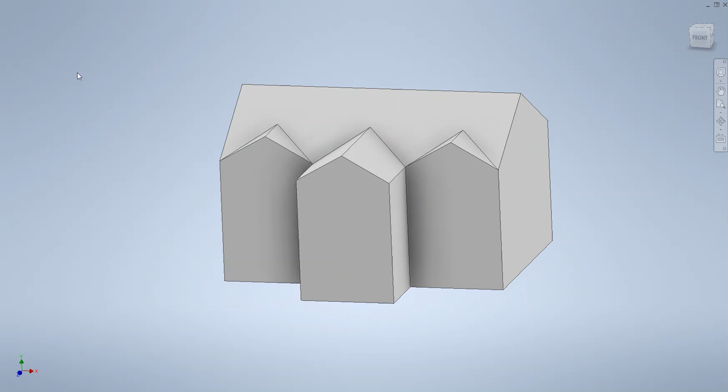About the window lines, we have to center each window inside the dormers. So I'm going to select the plane of the first dormer and create a sketch. Windows are supposed to be centered, so I'm going to draw a construction line that will enable me to center the window. To do that, I'll generate the line and find its midpoint.

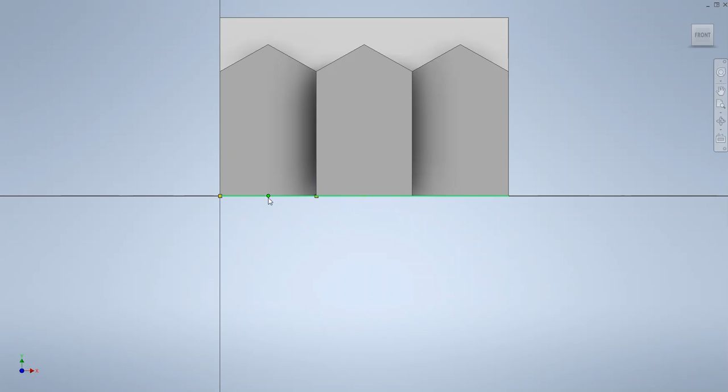Now, how high should the windows be? Normally windows are about 7 feet above the floor, but inside the floor of the house is at least 12 inches higher than the outside ground level. So we're going to make it 8 feet high. I'll draw a line that's about 8 feet high, 0.8 inches, then escape key. This is the beginning point of my window line.

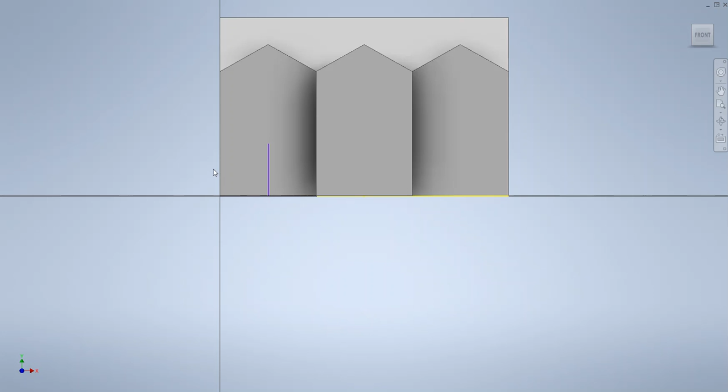So I'm going to use the rectangle command and select the top point, generating the first half of the window. This is going to be a 3 by 5 feet window, so width is 3 feet and height is 5 feet, meaning 0.5 and 0.3 inches.

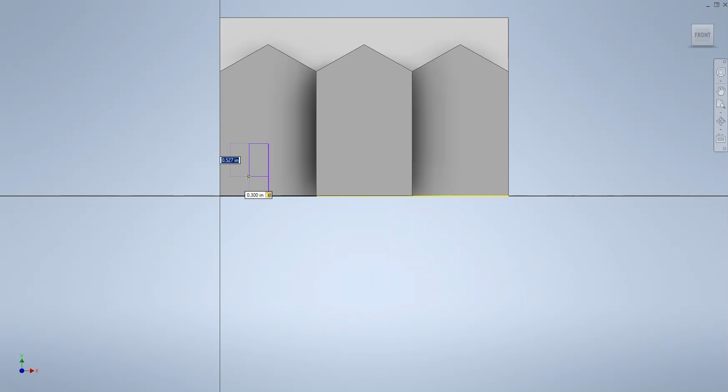I'm typing 0.3 because width is already highlighted. Now press the tab key, type 0.5, and press enter. First half of the window is created.

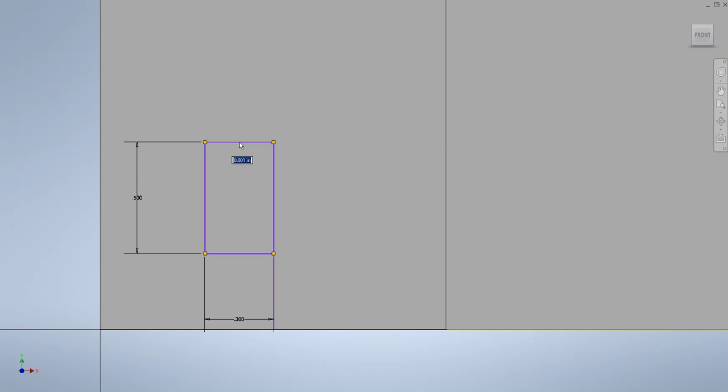The second half is going to be an exact mirror copy of the window. I'm going to zoom in a little bit to show the thickness of the frame of the window, and use the offset command to select it. This is about 0.2, or 0.02 inches should be good enough.

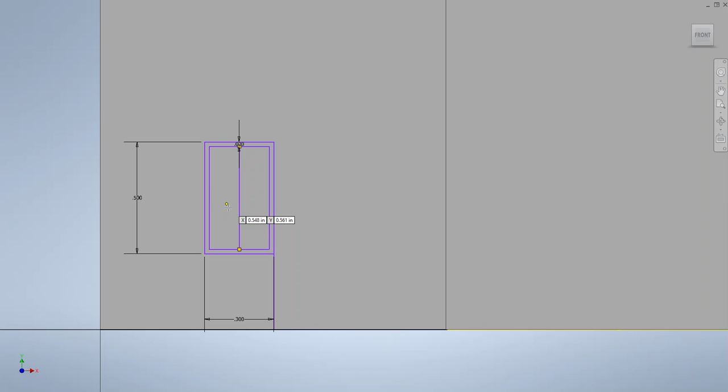Now I need to draw a vertical line from midpoint to midpoint, because this is a double hung window. A single line, and then another single line again, midpoint to midpoint.

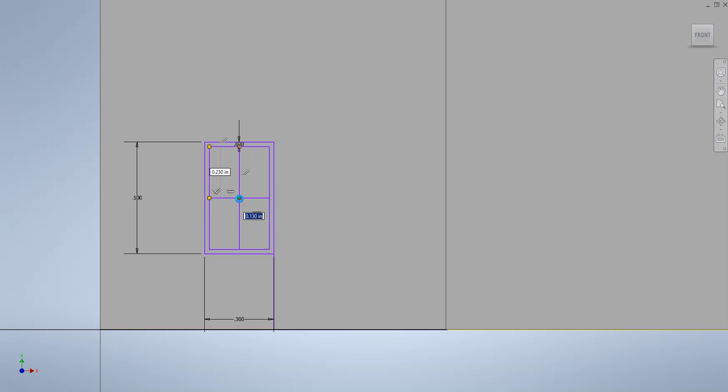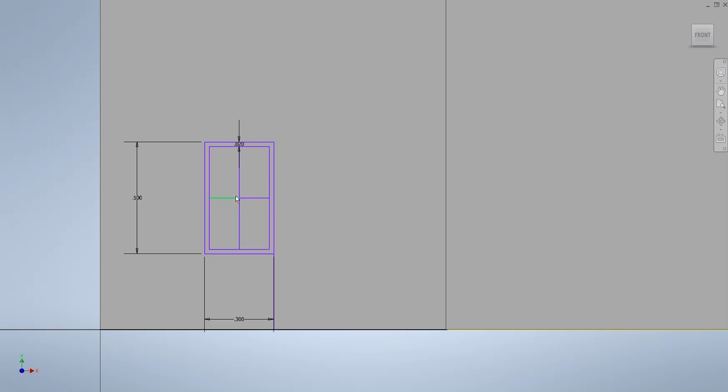I'm creating a rectangle right now, and generating another rectangle, and one final rectangle here. So each of the four rectangles will be projected and offset by 0.01.

And after projecting 0.01, we're going to do another offset, this time 0.02. That's about the thickness of each frame.

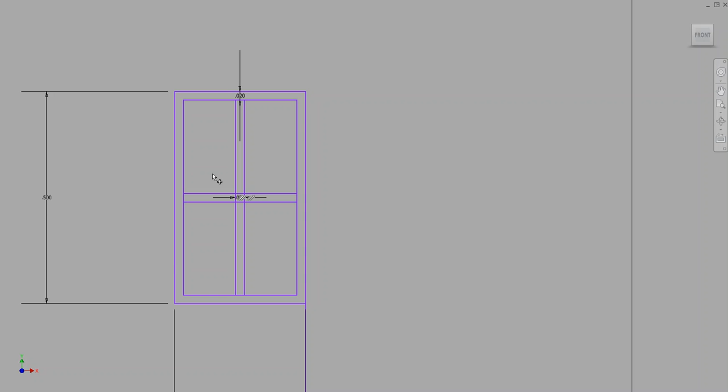I'm going to erase the extra lines that we don't need, because my second projection is going to be 0.02. So I press the line and erase, and use the offset command again, this time to the left, 0.02. We need to trim some of the lines here.

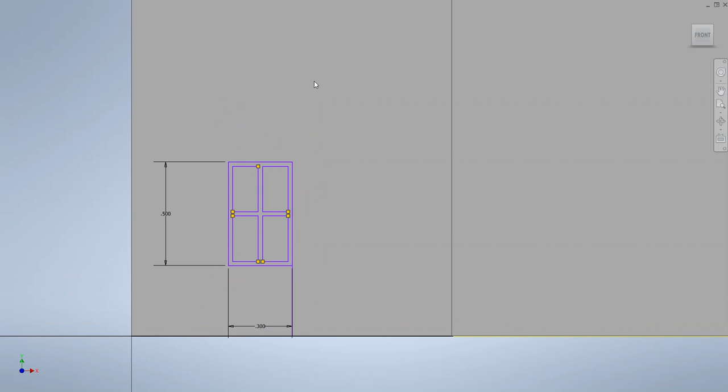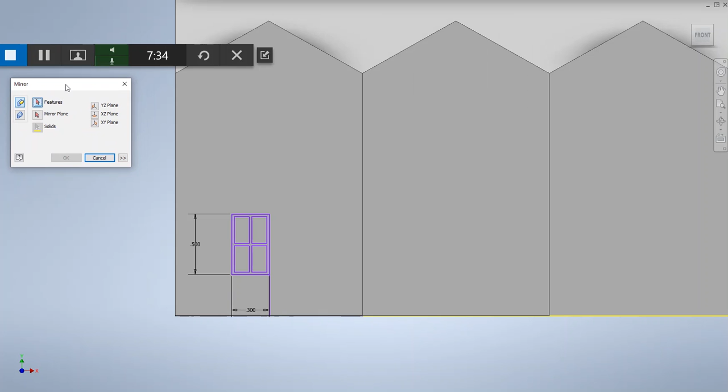So that's half of the window. The next thing to do is make a mirror copy of the line based on the window, and that's exactly what we're going to do. There's a mirror command in the middle of the screen, and we're going to select that and select the entire window features.

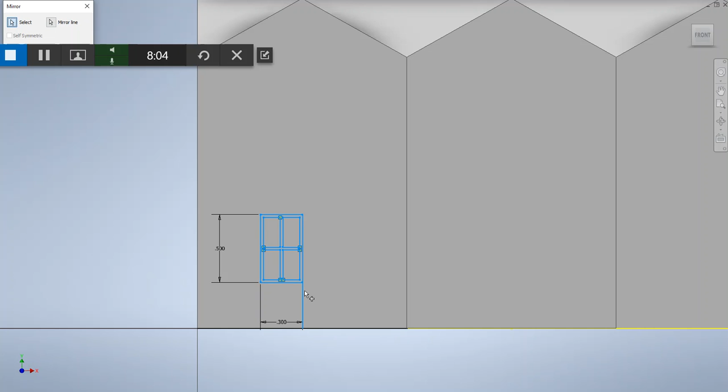I'm still in the shell, still in the sketch. Select the mirror command, select the window, and select the mirror line option. The mirror line has been selected. Click apply, and it's done. That's what it looks like.

We can apply it to the second floor and then to the next dormer and so on. So I'm going to use the copy command to apply it to the second floor, which is going to be about 11 feet high, or 1.1 inches at the scale.

So I'm using the copy command, selecting the object, selecting the base point. I'm surprised right now that it doesn't show me the distance of the copying vertically. I should have chosen the precise input.

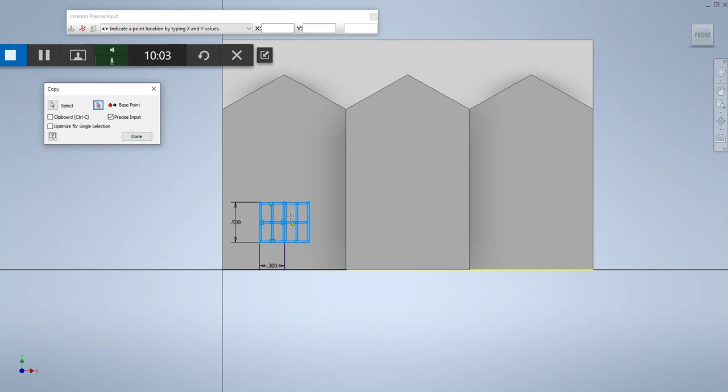So I'm going to draw a line again, just to make sure. Now precise input gives you a screen on top which is going to help me. I'm going to use it one more time after selecting this. So, copy command, select the entity, select the base point, select the top of the line.

Now, we want this to be perpendicular, about 10 feet high. I might as well draw a line.

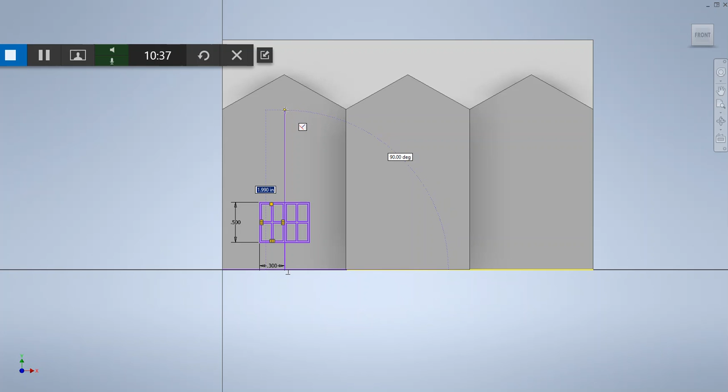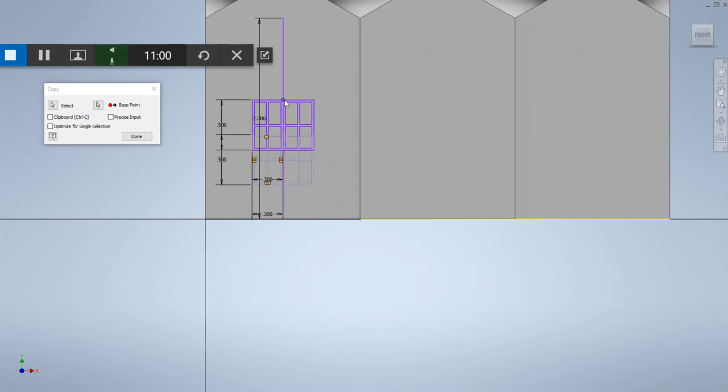Okay, now use the copy command. Copy is made, and now we're going to extrude.

Before extrusion, I need to erase the line that we don't need anymore. I'm finishing the sketch at this point, saving my work, on the desktop this time. You can save it on your personal drive that carries your student ID number.

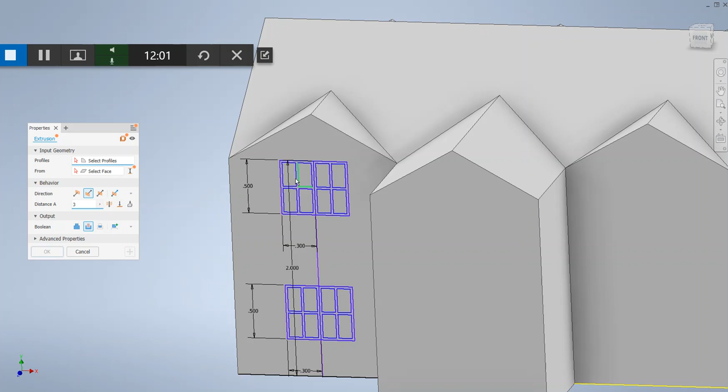And I'm going to use the extrude command. There are going to be two kinds of extrusion. The holes have to be extruded with a cut option, about 3 inches. So I'm changing the number to 3 inches, and I'm going to select each one of them.

Just wait until the square is selected. Move your cursor on the square with a cut option, cut type of extrusion. And you're going to keep doing this for the second floor window and first floor window as well. Wait, move your cursor, wait, be patient, then click. Do not click quickly, wait until the computer recognizes.

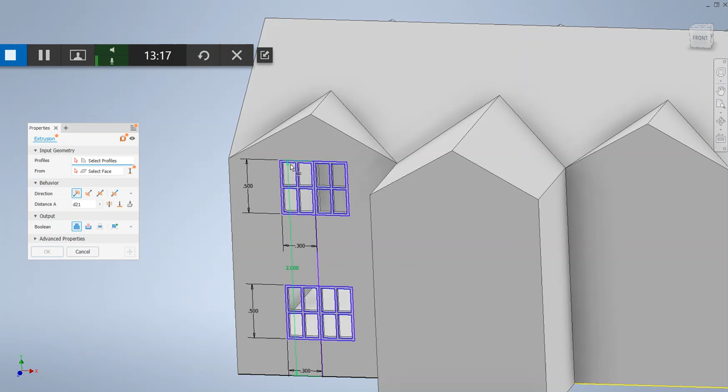All right, and now this is one kind of extrusion, the cut kind of extrusion. Next extrusion, I'm adding, the window frame has to be extruded towards me. This was an extrusion away from me; now it's towards me. So I'm adding the plus button at the lower right-hand corner. Now I'm selecting plus extrusion, and this extrusion is going to be...

0.1 inches. Click. That may be too much. Let's go with 0.05, half of that. That's probably better, okay.

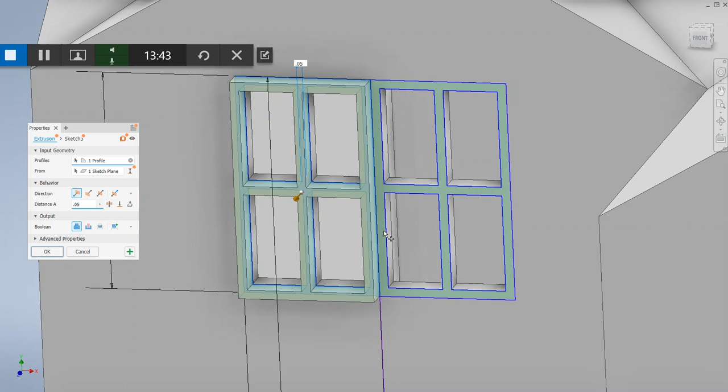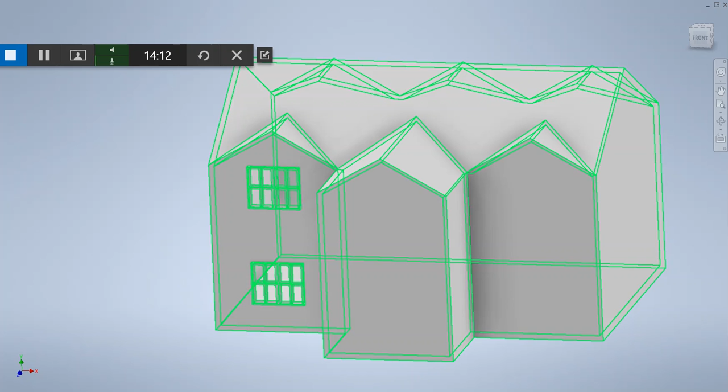And I'm going to do the same thing here, and then same thing here. All right, so this is one type of window, on 2 floors. I'm going to save this as activity. The next window is going to include 1 door, the entrance door, and the second level window.

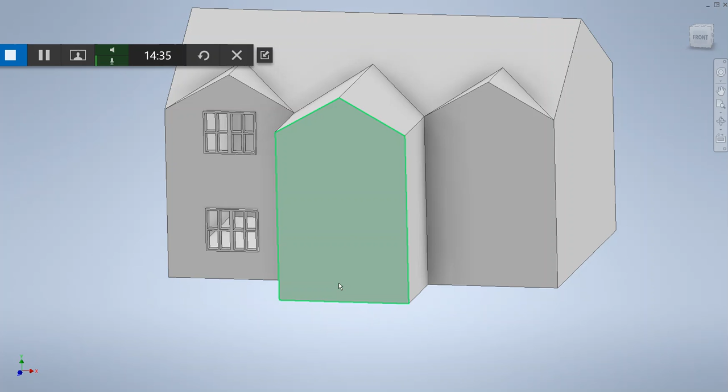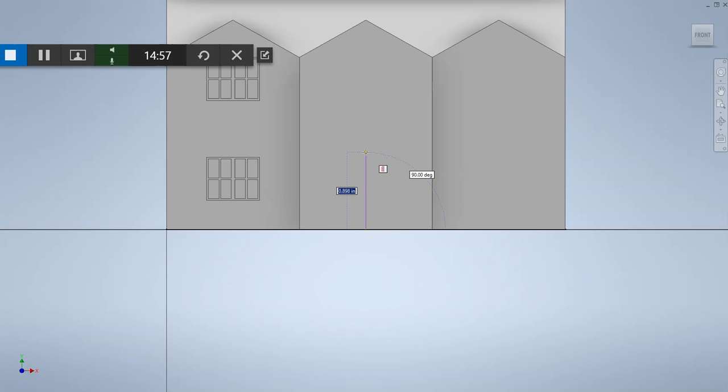So here is what I'm going to do for the front dormer. I'm going to select the surface plane and create a sketch, and pretty much the same practice. I am drawing a line again from the midpoint of the dormer all the way to 8 feet, because it's supposed to be 1 foot higher. So 0.8, enter, and that's my starting point of my door.

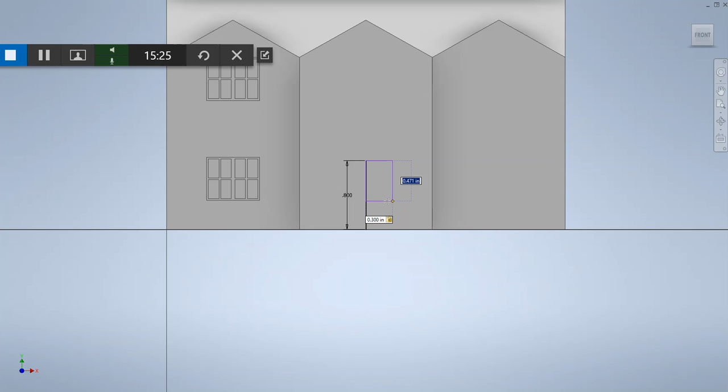And let me create my door with a rectangle. Exterior doors are usually 3 feet wide, so I'm going to enter 0.3, then press the tab key and enter 0.7.

I'm going to move this door to where it's supposed to be, so the top line of the windows lines up with the door, and that's the way it's supposed to be. So I'm using the move command, selecting the door, and picking the start point at the center.

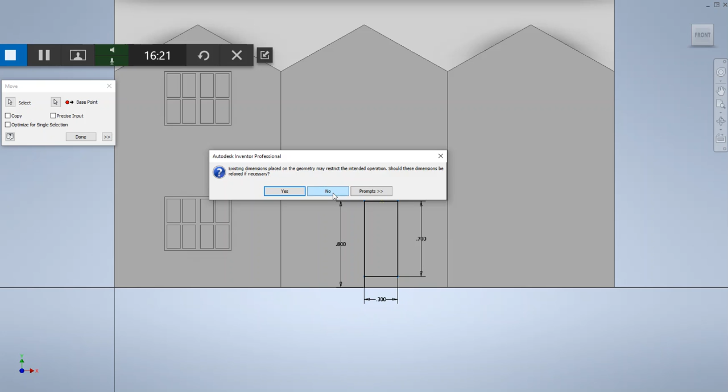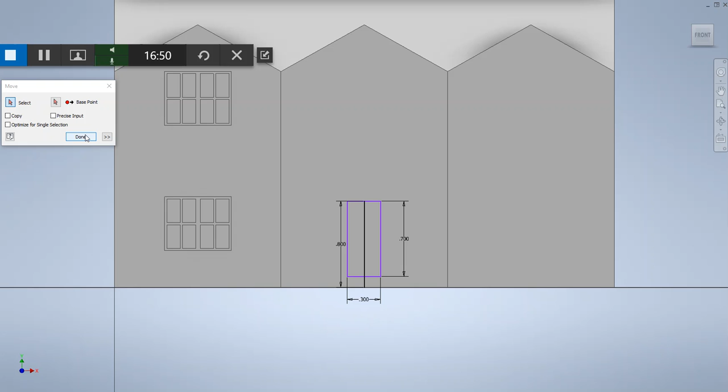It's asking me whether I should be removing constraints. No, I said no, and it automatically creates a number of constraints, which is for your own good but not necessary in this case. So I just defaulted and overridden the default. It's done, and this is your main entrance.

And now I can erase this line. Okay, now I can create the windows the same way we created earlier. Again, windows are supposed to be 3 by 5, so the highlighted number is supposed to be 0.3. Hit the tab key and 0.5, and enter key.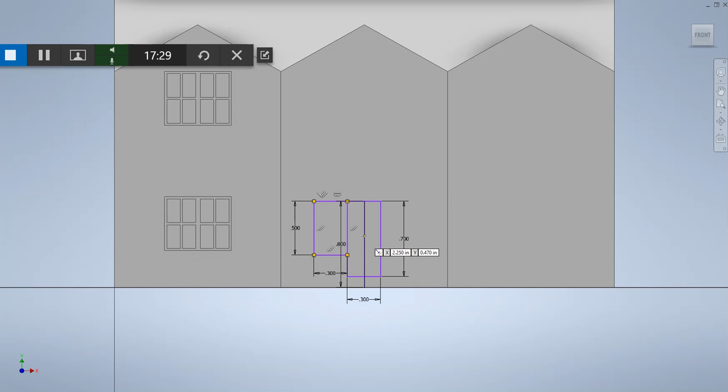I'm going to move the windows. I'm going to keep the window here, and if necessary, move it a little bit off. So hit the escape key because you don't want the rectangle command again.

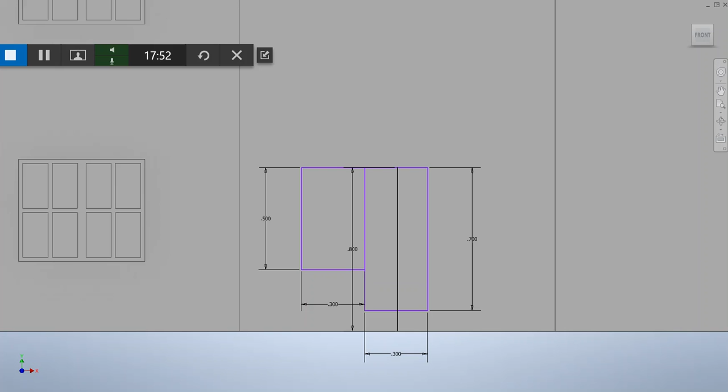And let's use the move command. You need to select it first, and then the base point of the move, again to the left. Okay, that is done.

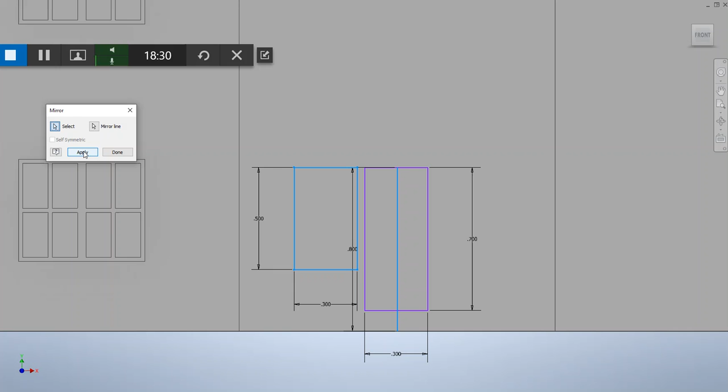This window is also symmetrical, so I'm going to use the mirror command, select the window and select the mirror line option. The mirror line is already in the middle, it's a good thing that we didn't erase it. And click on the apply command. There it is.

So let's use the offset command for the window to offset, and 0.02. Perhaps we should do the same for the door also, again 0.02, enter.

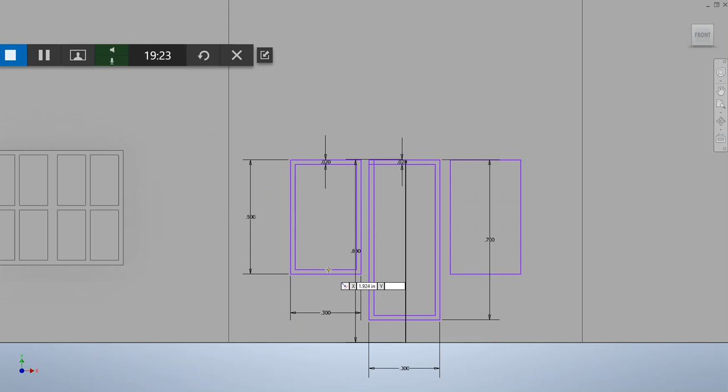Now let's draw the mid lines. The computer recognizes midpoints, showing you the green indicator.

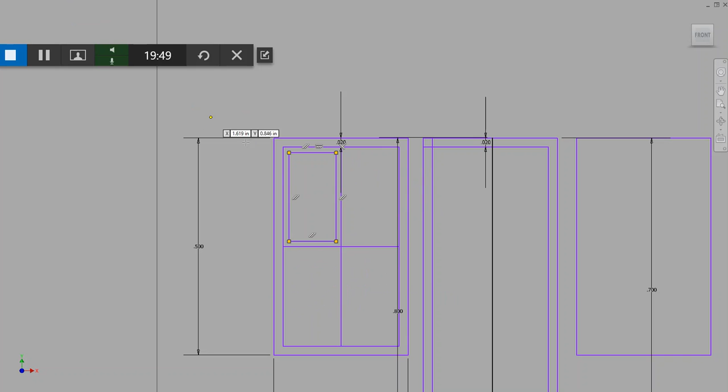So once you draw the rectangle, you can mirror copy it. Mirror is a very useful command, but you need to select what to mirror first, then select the mirror line, and then apply.

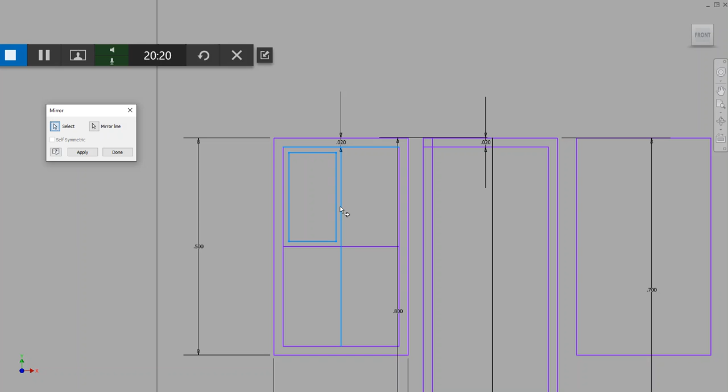Done. And mirror again, the same way. You need to select what to mirror first, then click on the mirror line, and then apply.

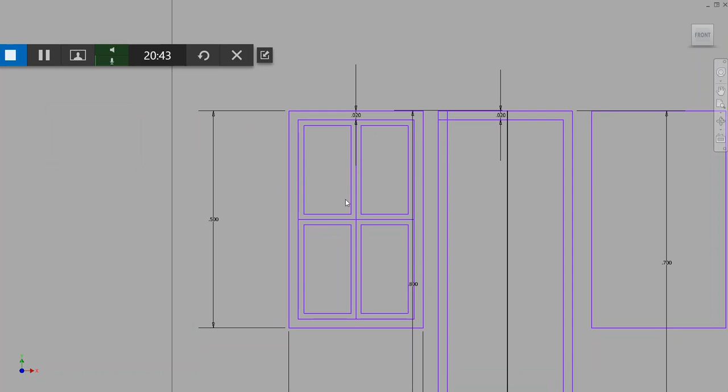Now, if there are additional lines that you don't want to keep, you want to erase them, of course. Delete key.

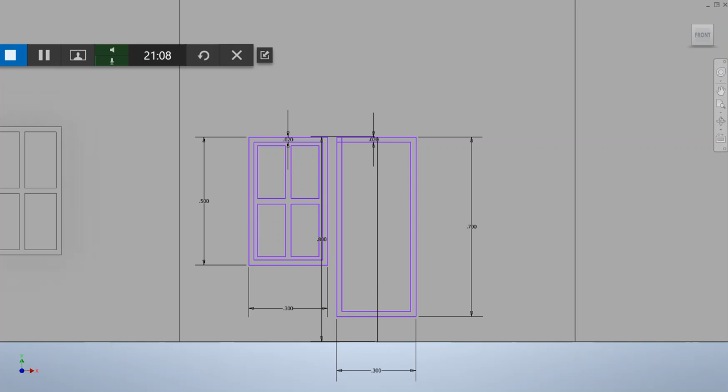All right, and perhaps we should do the same by mirroring the left side to the right side. So what I'm going to do is delete the first rectangle that was mirrored before. I'm going to use the mirror command, select the window on the left, select the mirror line, which is already in the middle, and then apply. Okay, mirror copy of the left window is already done. Click on that. All right, so far so good.

Now we need to move up to the second floor level. For that reason, I'm going to add a line for the second floor line. That's going to be 2. Enter.

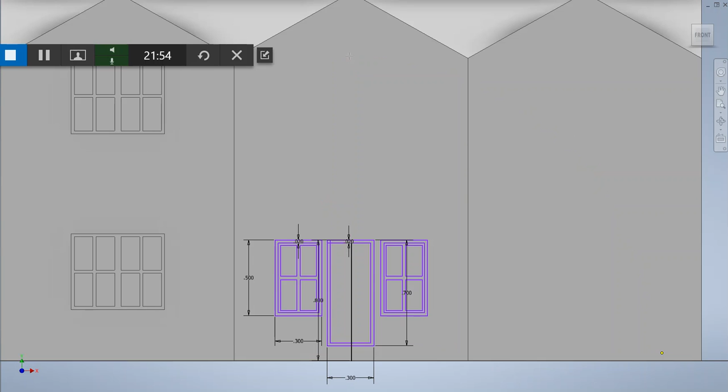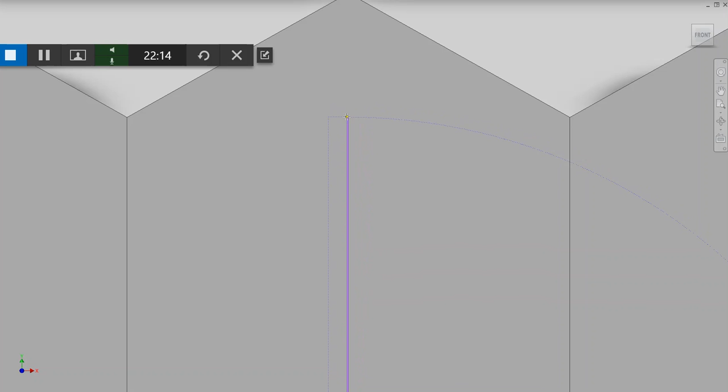And that line didn't come out right, so I'm going to try it again. 2 feet. I'm not sure why the line is not coming correctly. 90 degrees, this is good. So I'm going to just simply enter, and then enter. Escape.

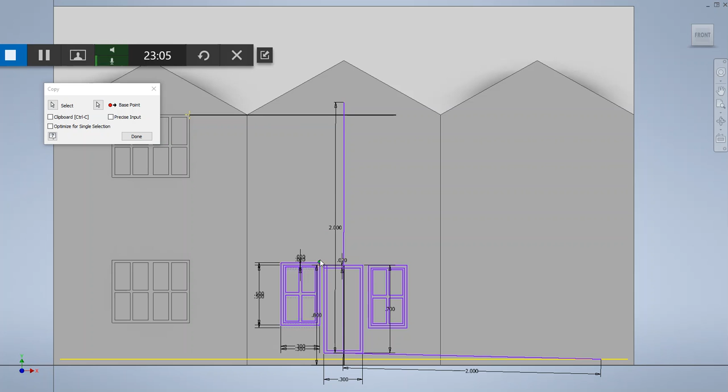Draw another line from the left. That should give me, because all the windows are supposed to have their tops line up with each other. And I'm going to use the copy command to copy the first window from where it is. Use the top right corner, move it in the place where it's supposed to be, the intersection of these two lines, click, okay?

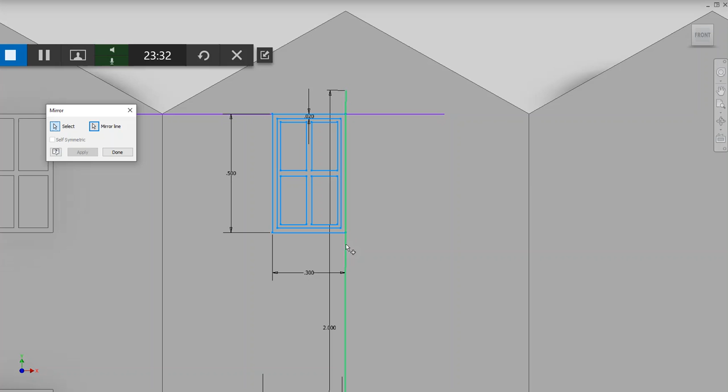And the right window is supposed to be also mirrored of the left side. So I'm going to use the mirror command, and select the window, okay, use the mirror line, and apply, and done. Cool.

We can erase the lines that we don't care about anymore, okay? Delete, and delete, and delete. Okay, and finish the sketch, save your work, of course.

Now let's do the extrusion process.

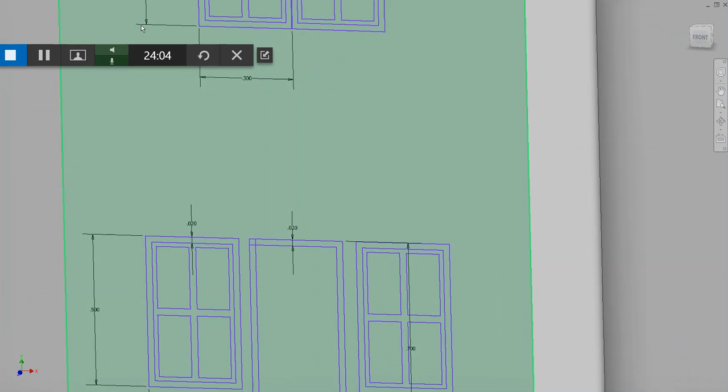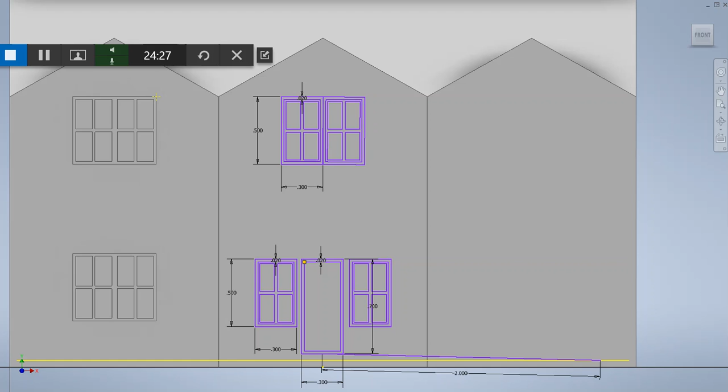There are some trimmings to do. I'm going to go back to sketch and do some trimming because it's needed, over here in the corner. All right, finish the sketch, save your work.

Now we're going to use some cutting, extrusion cutting, okay, for the window panes. It's going to go this way. How much? We got 3.33 feet extrusion, cut kind of extrusion.

Move your cursor on each window pane. Wait until the computer recognizes it by changing its color. Okay.

This is supposed to be 3.3 extrusion.

The door doesn't have to be, you don't have to have two doors. In the back, probably you're going to have a kitchen, but you're not going to have it. So for the door, I'm going to extrude it much less, okay? And that's going to be, okay, those.

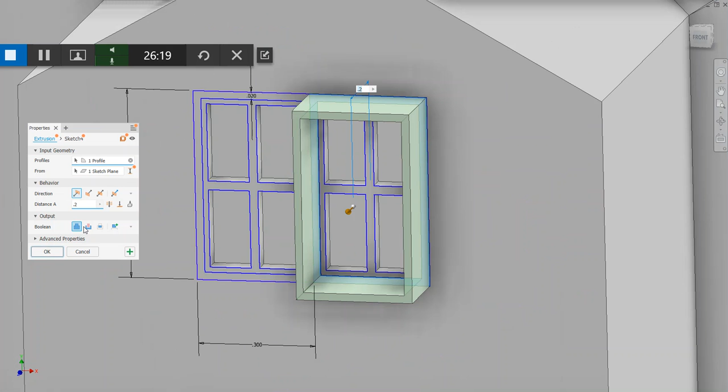And for the door, before we get to the door, I'm going to extrude, positive, additive extrude, okay, and 0.2 inches for each one of the window panes. Oh, that's too much, let's make it 0.05. And perhaps 0.04 for the interior.

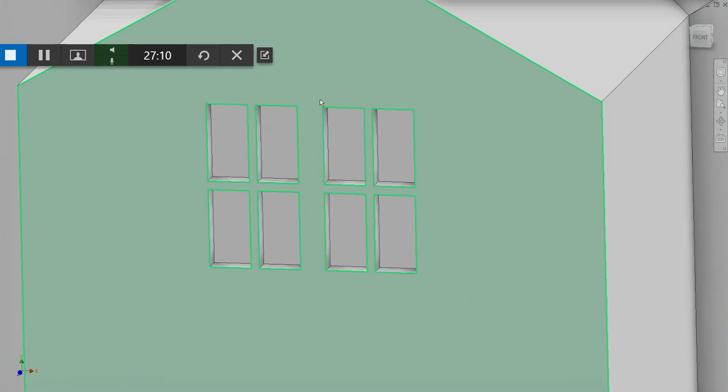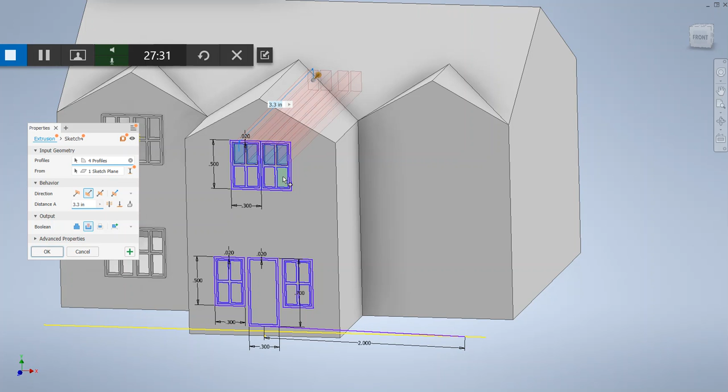Sometimes you have to do it twice. So we're going to use the extrude command, and we're going to use a cutting kind of extrusion, and we're going to use each one of them for the window panes to go through. Okay.

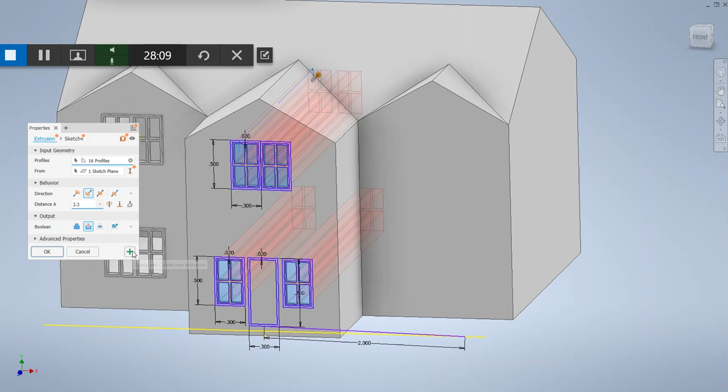Now we're adding, and the addition is going to be 0.05.

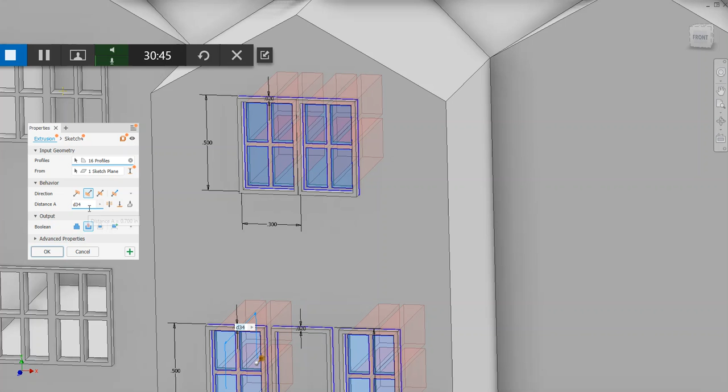Okay, so this extrusion is supposed to be 3.3. I'm typing just 3.3, enter. Okay.

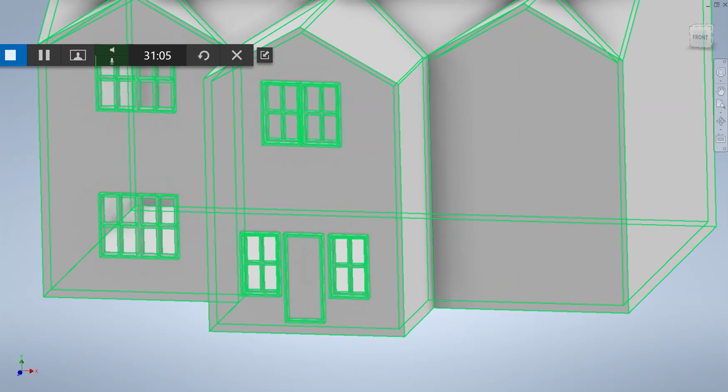And inside the area, inside the windows, there's going to be another extrusion. We need it inside the door. I'm going to just change that and simply add an additional extrusion. And this is a cut type of extrusion. Okay, and save your work.

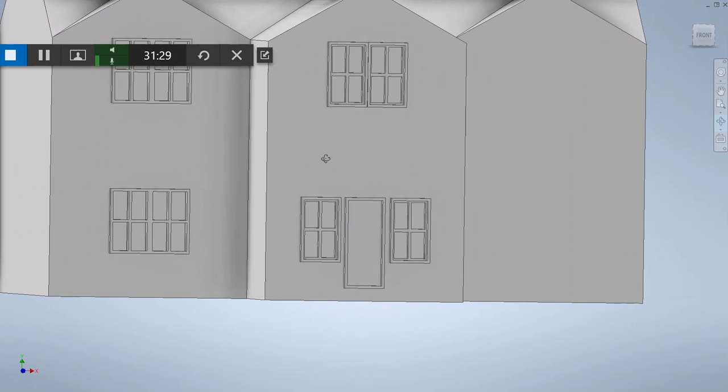Okay, so this is the way windows and doors are going to come out. And if it takes more than one try, don't be discouraged. Yeah, this is the way, slowly, gradually, and carefully we have to do that. And for the door, I'm going to make the door opening also at the same time.

And pretty much the same procedure will apply to the right dormer on the right, okay, again for the windows and doors. All right, thank you very much, and let's give it a try.

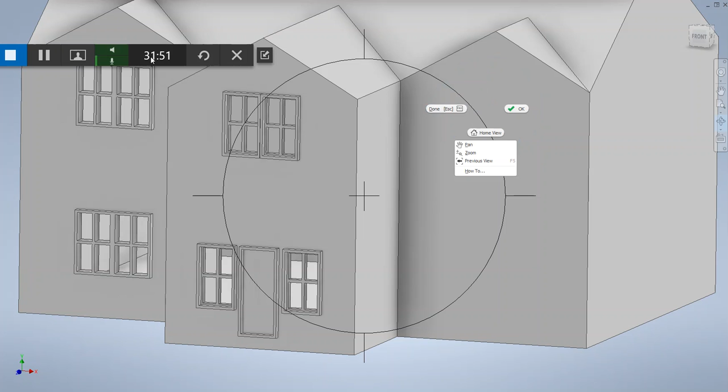All together, if you need help, call me. I will, as usual, be right next to you.